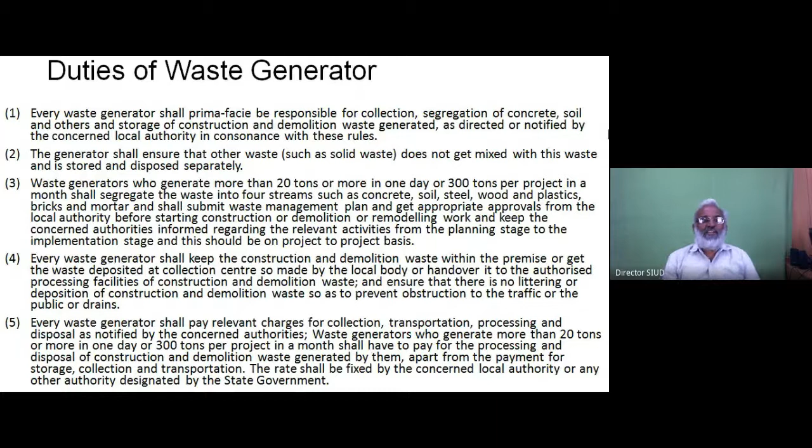Every waste generator shall keep the... shall... processing and disposal as notified by the concerned authorities.

My dear friends, you have got the authority to write up. You have to say that this is what is going to charge you. Don't do anything free of cost. If I am building a house, I have to at least spend 1 or 2% of the money for disposal of the waste. It has to be embedded within that. You cannot say 'no, it's not my problem, I'll just take cement and concrete and dump it, the government will take care of it' - that is not allowed.

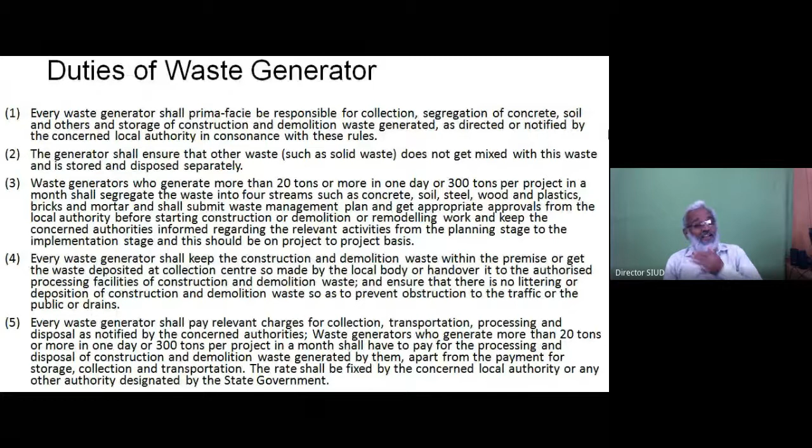Per ton, for example, it may be 5 rupees, it may be 10 rupees, it may be 20 rupees. It depends upon your capacity and how much waste is getting generated in that area. For example, in Mysore we have done a survey - we generate around 120 tons per day of construction and demolition waste. That's in the recognized sector; in the unrecognized sector we don't even know, it may be double that.

Then what are the duties of the service provider and the contractors? The government has clearly said either you do it, or make someone else do it on your behalf - that is where NGOs come in, and that is where a private party can start. Almost all C&D waste management can be operated on a PPP model - that is, public-private partnership model.

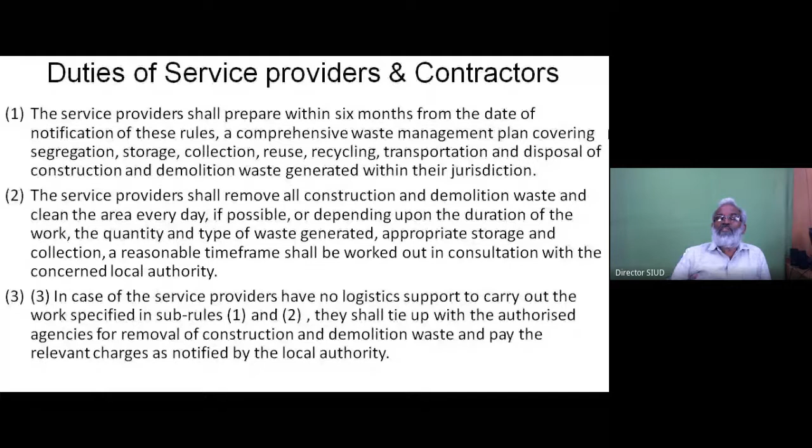In case service providers have no logistic support to carry out the work specified in sub-rules 1 and 2 - I'm referring to sub-rules - they shall tie up with the authorised agencies for removal of construction and demolition waste and pay the relevant charges as notified by the local authority. This is what I was telling you as tipping charges.

I can say that I'm a small contractor, I'm building only 20-30 or 30-40 houses. I don't have so many equipments, or I have to pay so much - it's fine, you don't have to, but make sure that you are going to dispose it with a relevant authority, paying relevant charges. What is the state government's duties here?

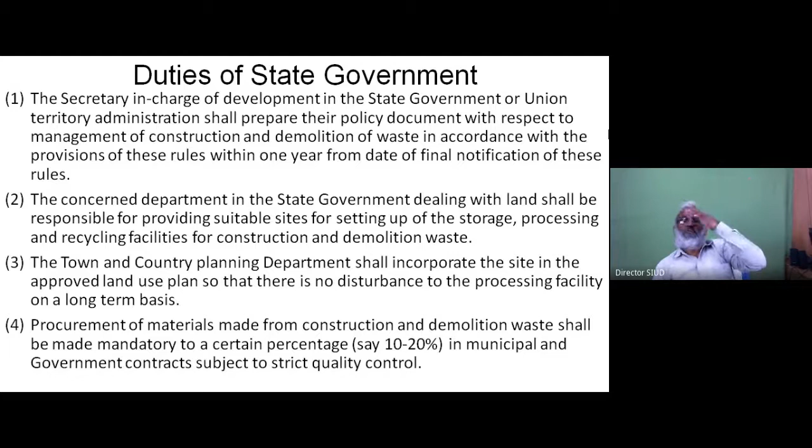Crushers, conveyors, screens. Okay, all these equipments, it will cost you not less than 1 to 2 crores.

So if somebody goes to the court saying that this is disturbing me, we have to just stop this on the state, and the whole process is going to stop.

So it is the duty of the state government to see that a proper suitable site is given, and to make sure that there is no disturbance to this processing facility on a long-term basis.

Procurement of materials made from the construction demolition waste shall be made mandatory to a certain percentage, say 10 to 20%, in the municipal and government contracts, subject to strict quality control.

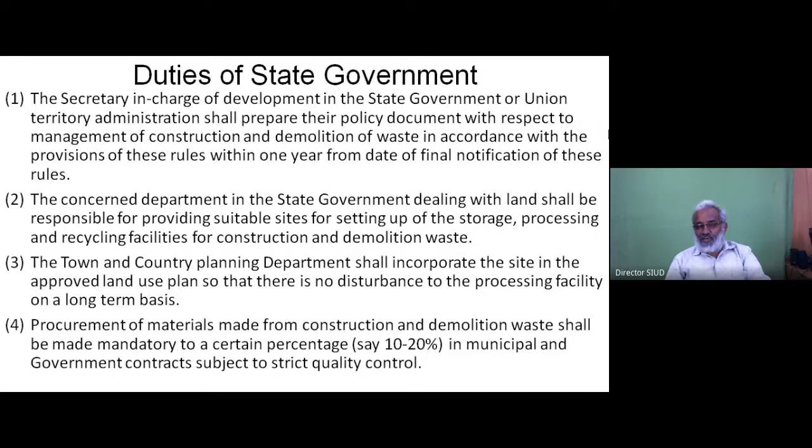Itself that this 20%, up to 20% can be made.

The urban local bodies we are talking about, the same thing, almost it is the same thing, because it's a smaller version. Issue detailed...

Urban local bodies, they can ask the person who is doing the construction, how are you going to dispose? You are not allowed to dispose wherever you want. Either we will provide you a site, or you have to reuse it, or you have to dispose it scientifically.

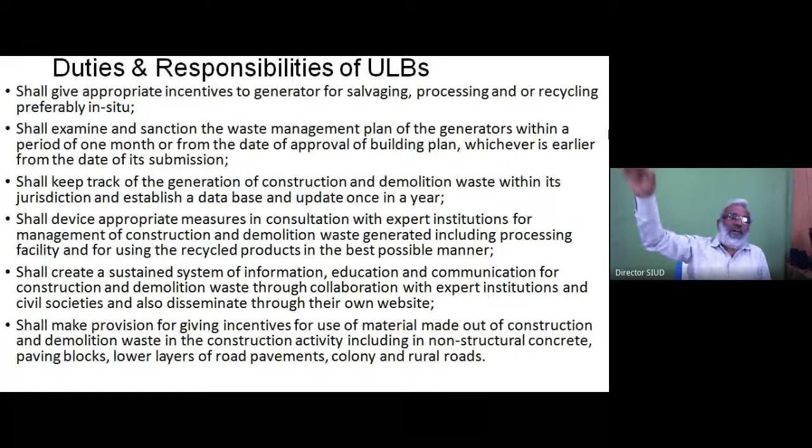Or what can happen is, you can educate them, you can give them the knowledge of how to make a soil stabilized mud block. Just want to bring in something here.

One of my friends - I don't want to mention his name because it becomes a person's praise - he's a well-known newspaper editor. He's in charge of one of the leading newspapers in Mysore.

He started constructing his house. When we were talking about C&D waste, he said, how can I do this? Believe me, my friends, he went around and asked me to provide him a soil stabilized mud block machine.

Which manufactures this soil stabilized mud block. He looked around at 3 or 4 buildings to see how it works out. And very recently, he has completed his building only with soil stabilized mud blocks.

The waste soil, or the recyclable soil, he has used and constructed his building with it. We are talking about news, we are talking about news channels.

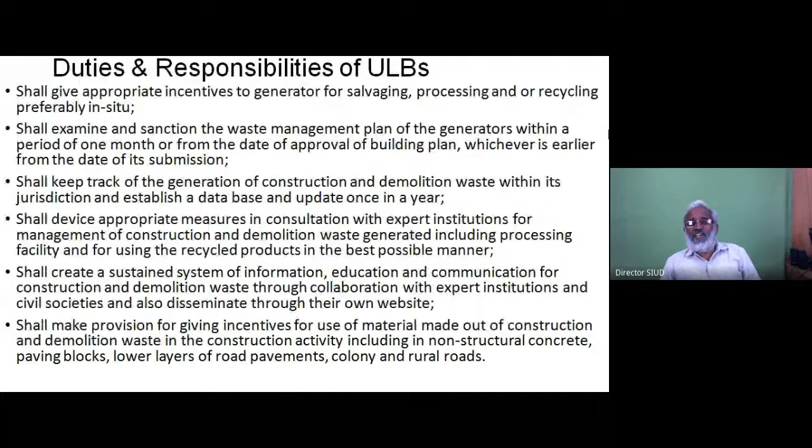These are the best places where you can disseminate this knowledge. Now and then we only look at the horrifying news, or the 'first among us' kind of news. So this 'first among us' news can instead be about sustainable buildings or C&D waste managed buildings.

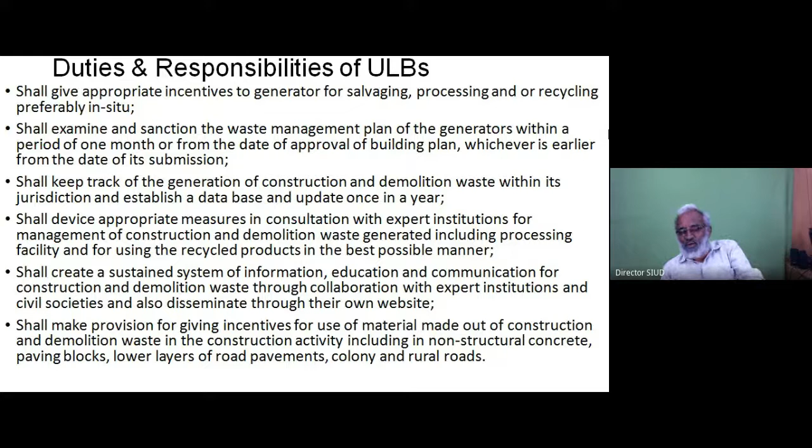Also the ULB shall make a provision for giving incentive. Not only in the state government, even here they can do this. Also for the lower layers of road pavement, colony, rural roads, wherever applicable. I will show you the products here.

Once I show you the products, then you will understand how best it can be made. How do you manage this? What are the methods of management?

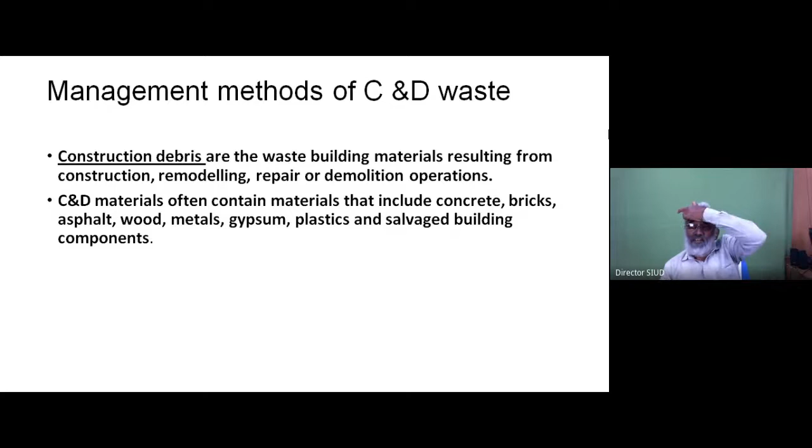See, what is construction debris? They are the waste building materials resulting from construction, remodeling, repairing or demolition. That's all, nothing else. The C&D material often contains materials that include concrete, bricks, asphalt, wood, metals, gypsum, plastic,

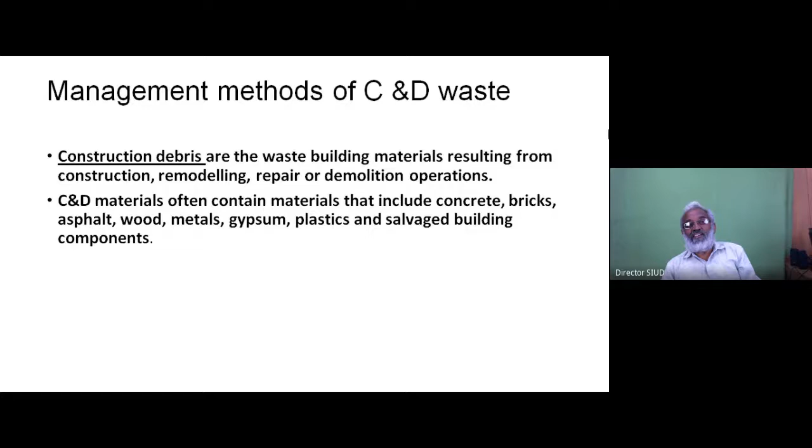Advantages of upcycling the C&D materials. Number one, it's a clean city. Any one of you, are you ready to look at your city or next to your house with the debris? I don't think anyone would agree with it, right? Everybody wants his house and his neighborhood to be clean. Then who is responsible? We all are responsible. So how it works is to see that you support the clean environment.

Most important, it saves the material cost itself. You're throwing something out and bringing in new materials. You can save material cost because the same soil stabilized mud block with the same excavated soil, if you make it, you're going to save money on that fresh material.

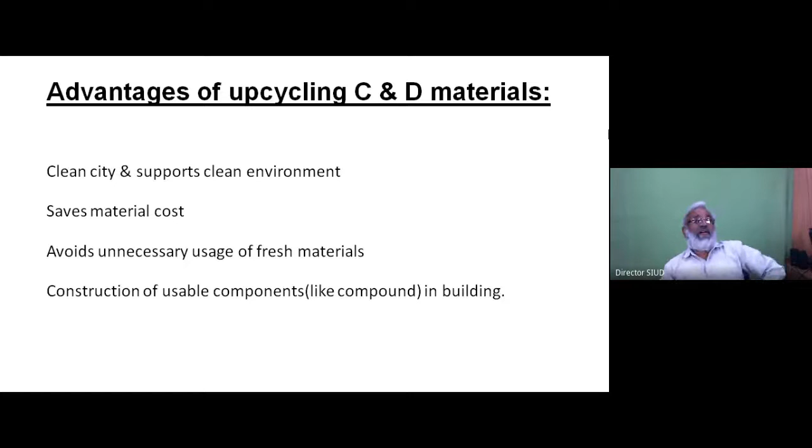Construction of usable components, okay, like a compound in a building. You don't have to have an M20 grade concrete there. You agree with that? Or it should not be a shabby, falling off thing also. You can have a better quality with a soil stabilized mud block or in situ concreting itself.

Where does it go? Look at this now. Let us start looking at those beautiful things. Everything in this picture is made out of waste C&D material. You can see many things over here. On the right side corner, you can see it is a precast staircase.

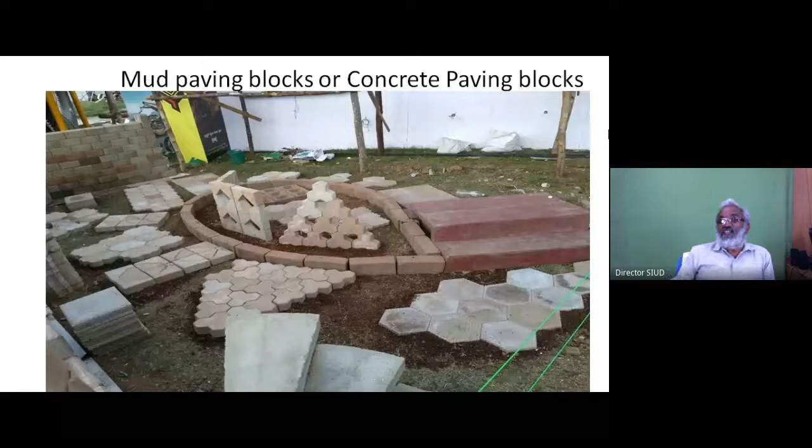The interlocking blocks on the pavers. Your veranda can have it, your walkway can have it. The first one in the center, the picture is not complete, it is for the spiral staircase. The normal bricks, you think of it, you can make it with the C&D waste.

See, this is a compound wall, 3 feet at one stretch, and up to 6 feet you can have a compound wall. All you have to do is have a shuttering plate, do the proper ramming, and you can have a rammed earth wall. In fact, if you see the photo, it was just taken after the rainfall. Still the wetness is there on the downstream also, you can see.

So nothing will happen. Our good old technology, especially if you go to the villages, are all mud blocks or mud walls. They have been standing some 100 years. Throughout the world, rammed earth is there. Now we have just added the English or scientific word of ramming it. That's all, the earthen wall is there everywhere. I have seen it in many parts of India and abroad. And if you just travel from Mysore to Hassan, Mysore to T. Narasipur, everywhere you can see these kind of mud walls.

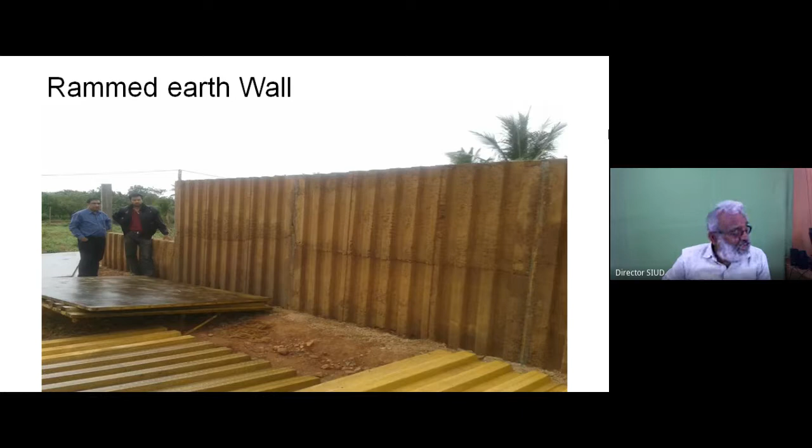But now, using science, proper centering, shuttering, and proper ramming, you can measure how much you have to ram, what the pressure should be, everything. If you consider the soil density, you can have a beautiful wall, and it can stand for many years without any problem. Most importantly, when you demolish this, you again get only soil, nothing. You don't get any waste from this.

This is what you have to do. When you start building bigger things like apartments and huge complexes, once you do the segregation - in solid waste management, which is also construction and demolition waste, segregation is very, very important. If you do segregation properly, half of your problem is finished.

The wood, especially shuttering wood and similar things, people search for wood. Actually nowadays it is very difficult to get wood because you have to cut a tree, which is not really a good thing to talk about.

The smaller pieces, smaller centering sheets for pillars can be taken from these things.

The steel - sometimes you just throw away a 1-inch MS pipe. If you cut a 20 feet pipe, you need about 16 feet, and 4 feet you just throw away. It will lay in the soil for many years. If you segregate it properly and weld it properly, the same 4 feet pipe can be made into another 20 feet when you join 4 or 5 of them. Welding is a fusion - you have to do it properly, then you can use it properly.

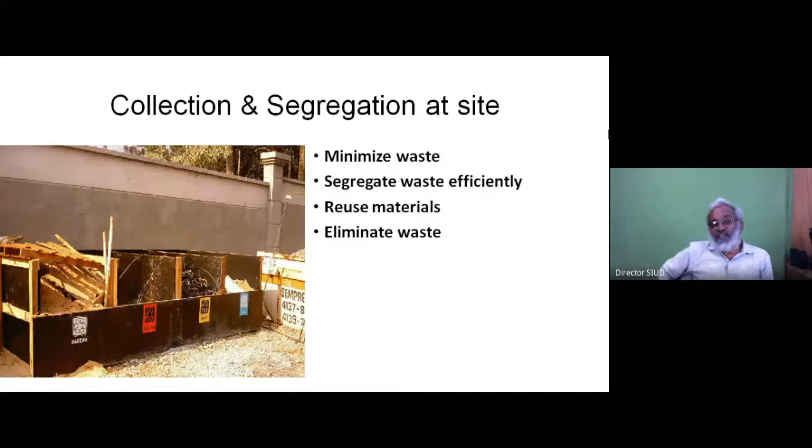The plastic is not at all a waste. We have made up our mind that plastic is a waste, but it is not so. What are the value-added products available through this C&D waste?

Can we have a system where you can just go to a house and collect these boulders? I have done this myself in a couple of villages. I'll go near their house and ask, are you ready to dispose of it? Can I clean this? I will pick it up at the rate of 2 or 3 rupees per stone. Initially they will hesitate, but once they know their area is going to get cleaned - since it's been lying there for 2, 3, 4, 5 years - they'll agree.

Droplets of water can make a mighty ocean too. So when you collect this, you can collect at least 2 to 3 loads in one day. It is possible. And when you crush it properly and segregate or screen it properly, you get 10mm minus, 20mm, 30mm, 40mm aggregate, which is very much needed.

The maximum amount you have seen in the pie chart is the soil which is available - it's about almost 40 to 50%. Where should that soil go?

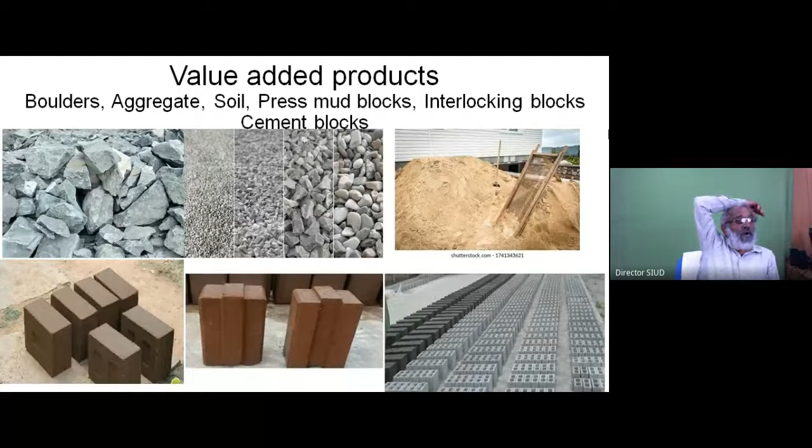At the lintel, again you use precast or ready mix, whatever types are available, and then you can continue the blocks. You have already seen a couple of buildings - this is the same material that has been used. The first building is with the soil stabilized mud block, the second one is with the interlocking blocks.

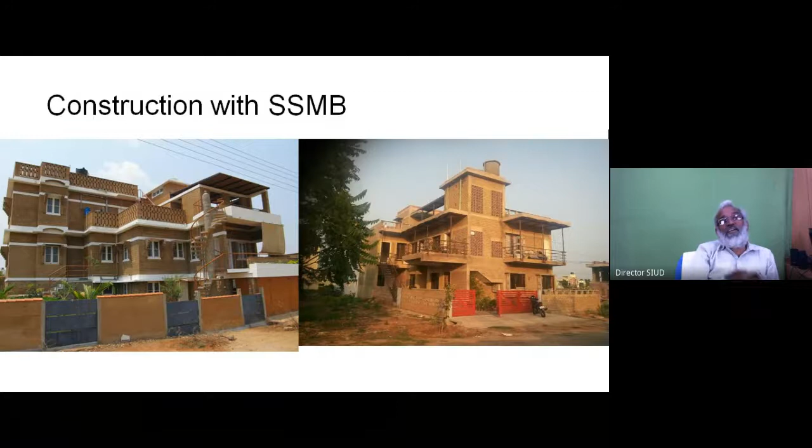This can happen - all we have to have is an attitude. The last picture is of egg layers, as we call them. This is the locally made soil cement concrete block, hollow - it is also hollow inside, as you can see.

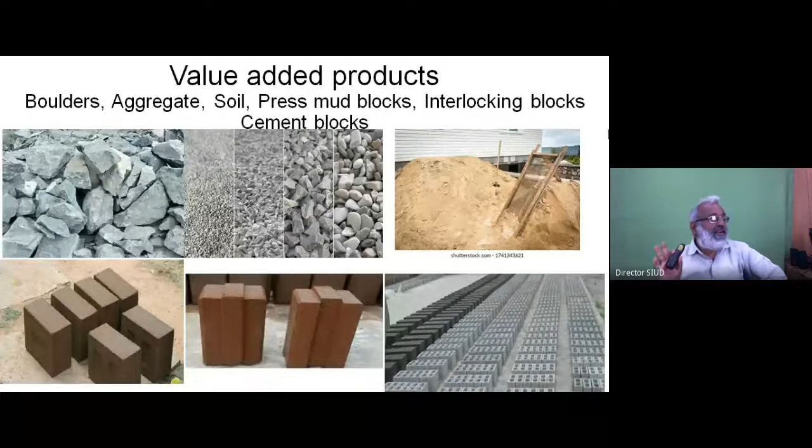Again, in this, except cement, everything is local material. Except cement. Okay, this can be done very easily.

Have a look at this. We are talking about plastic. We are talking about C&D waste. This is the IL&FS plant, which is in Delhi.

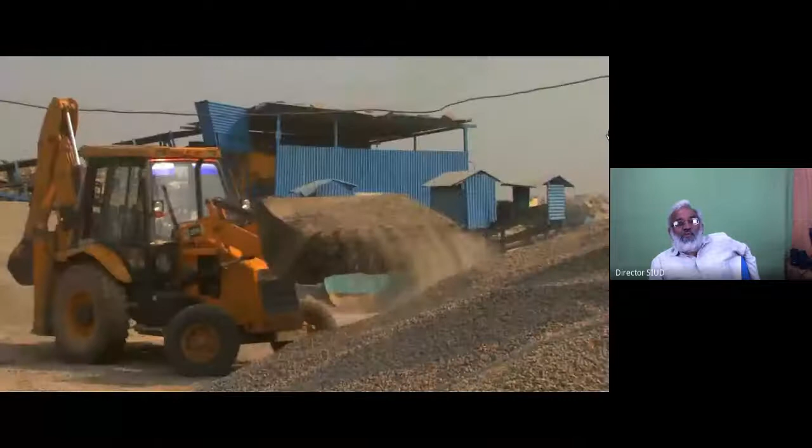I'll keep myself mute for a few minutes. The video is quite explanatory. You can look at that.

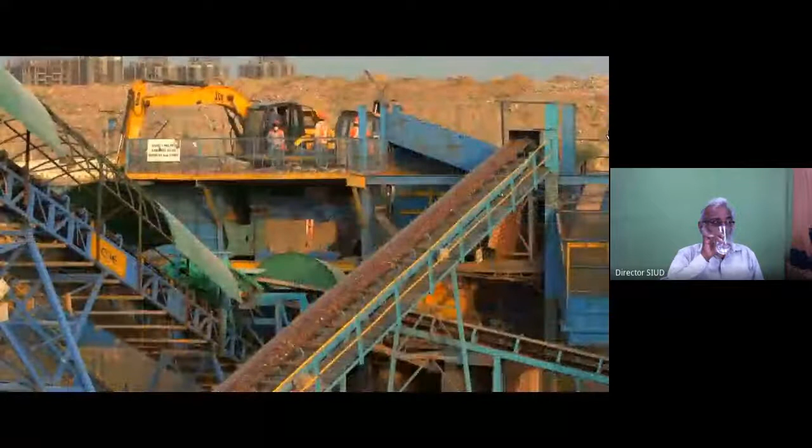As Delhi grows, infrastructure projects like construction of roads, flyovers, and metro routes generate large quantities of construction and demolition, or C&D waste. The city of Delhi itself generates 4,000 to 5,000 tons per day of CND waste.

In this context, an initiative by North Delhi Municipal Corporation with IL&FS Environment is a ray of hope shining through the blinding construction debris in the nation's capital. This unique project at Burari Jahangirpuri is based on a public-private partnership framework.

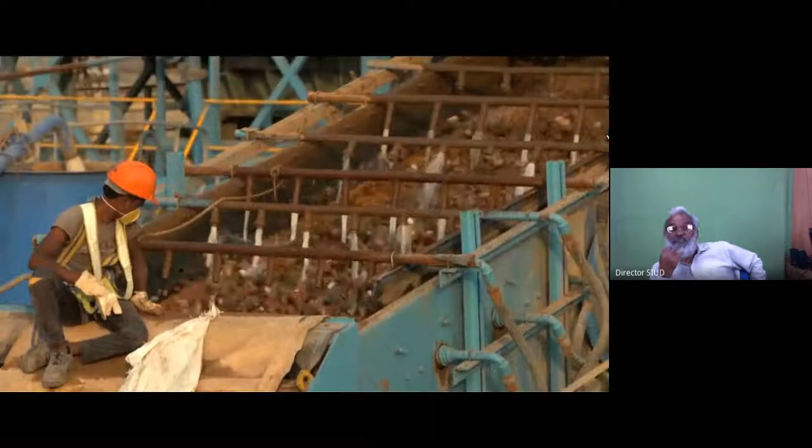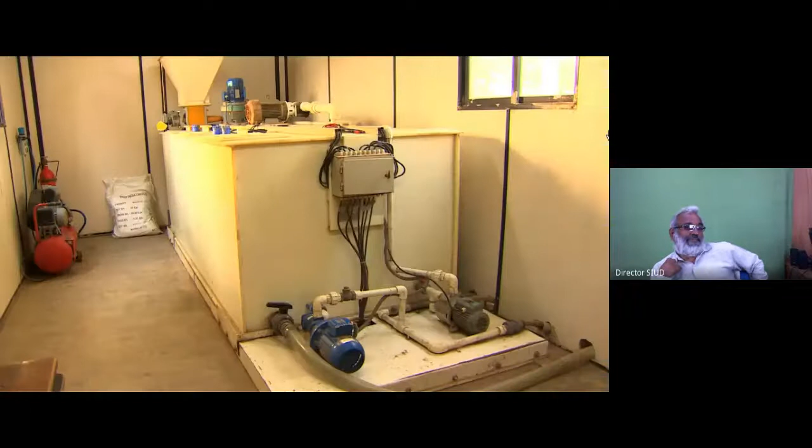It is India's first large-scale operational CND recycling facility. The plant is compliant with MSW 2000 rules and was originally set up to manage 500 TPD, or tons per day, of CND waste. Recognizing the pollution abatement capability of the facility, Delhi Pollution Control Committee enhanced the project's capacity to 2,000 TPD.

The technology for the plant was adapted to suit the CND waste generated in India. The wet processing technology was incorporated at the Burari plant to minimize dust as well as noise pollution.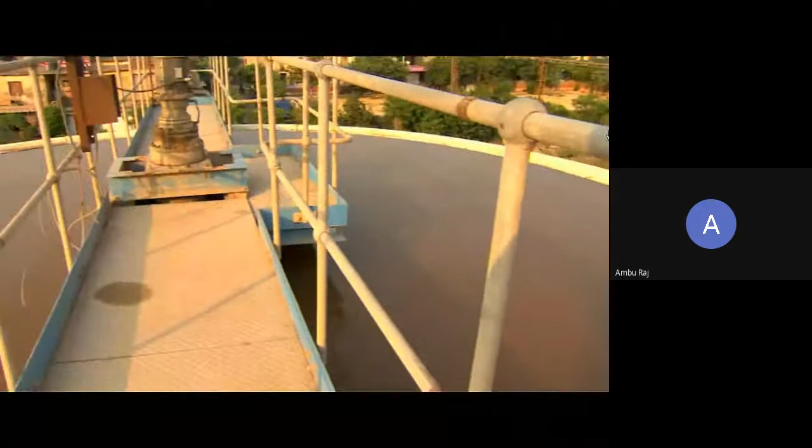The plant is able to recover and recycle about 95% of incoming C&D waste. The facility has ISO 9001, 14001, 18001, and SA 8000, that is Social Accountability certifications.

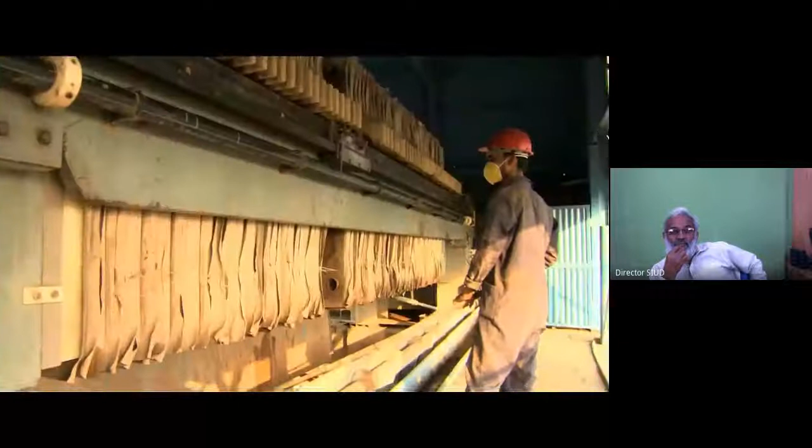Using the recycled aggregate in this process reduces the consumption of fresh stones and sand, thus preserving our natural resources and helping in reducing sand mining.

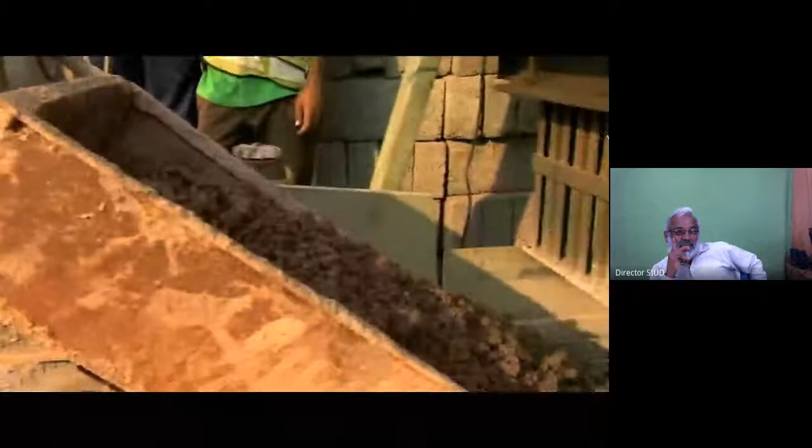The plant reduces the burden on landfill or dumping sites of the city and saves precious urban land. The Burari C&D waste management facility also provides employment opportunities to local North Delhi residents.

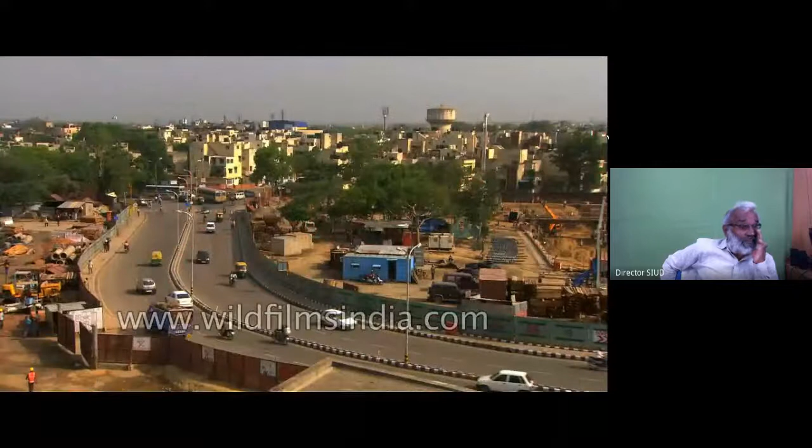With the steep rise in air pollution-related health problems and judicial interventions, urban local bodies face enormous pressure. In light of these problems, it is vital to have replicable models like the successful C&D waste management project at Burari. The C&D recycling project, being the first of its kind in the country, requires support for usage of recycled green C&D products.

The pioneering plant at Burari has earned many accolades from national and international environmentalists. This endeavor of IL&FS Environment has been appreciated by the Ministry of Urban Development, Government of India.

The Ministry of Urban Development has asked all states to look into the possibility of installing some facility for the population above 10 lakh people. The project has provided a paradigm shift for illegal dumping.

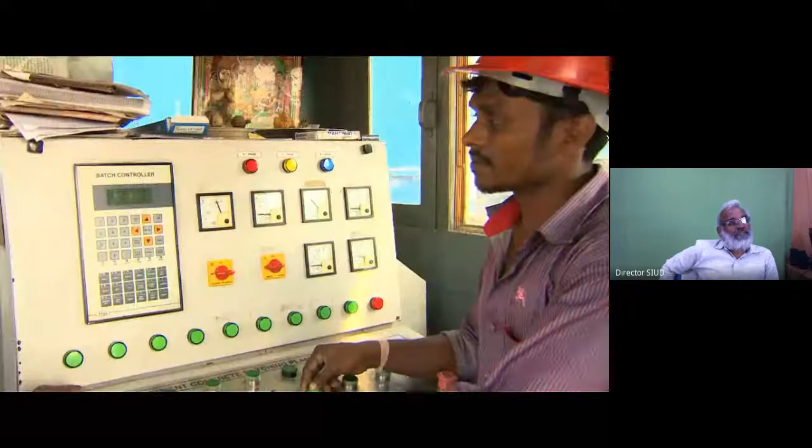I think you people have seen this and understood what is the value of the C&D. I'll show you once again. We were talking in this. We were talked about only the aggregate, the soil stabilized mud blocks, and other things.

Look at one more paradigm. This is yet another one. You can see this. Everyone calls plastic a waste plastic. But look at this now.

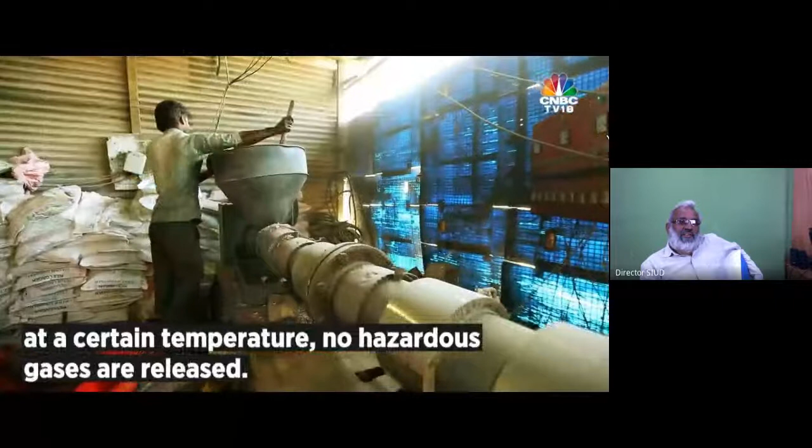Segregated plastic - basically using polypropylene, low density polyethylene (LDPE), and high density polyethylene (HDPE). This is a shredder machine. After shredding, it passes through heat and becomes molten plastic. There is no burning involved in this process.

I hope these two videos will open our eyes and show that there is nothing called C&D waste. People who are doing this in and around Bangalore, like the Indian Institute of Science, they're doing a wonderful job.

Rajesh Jain in Mysore is doing it. Ravi Kumar, Siddharaj, a small-time person on the ring road near Atinagar, is doing it too. And the list goes on. Here I've mentioned only the people I know, about 4 people around me.

But if I really go to the depth of it, those who make these pellets out of the plastic get prices that go up to 23 to 29 rupees, and sometimes it goes up to 60 rupees per kg. All these things are remunerative and easily available.

Now let us think, if we do all these things, what support are we getting? How do you select the site? The site for storage and processing of this recycling facility for construction and demolition waste shall be selected as per the criteria given in Schedule 1. We'll go to Schedule 1 later.

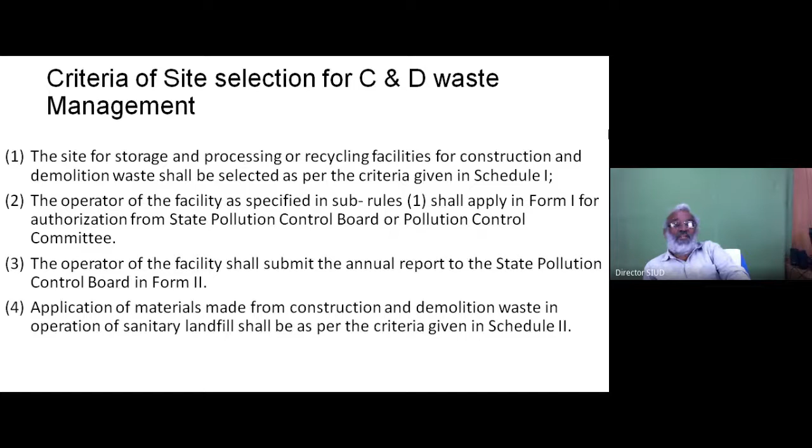The operator of the facility, as specified in the sub-rules, shall apply in Form Number 1 for authorization from the State Pollution Control Board or Pollution Control Committee, whichever applies at the ULB or corporation level. The application of material made from construction and demolition waste in the operation of a sanitary landfill shall be as per the criteria given in Schedule 2.

We just talk about Schedule 1 and Schedule 2 and leave it at that, but let us see in depth what Schedule 1 says. It is very clear: the concerned department in the state government dealing with land shall be responsible for providing suitable sites, as per rule 7.1. That means the government has to provide a proper place for these recycling facilities.

The local authority shall coordinate in consultation with the Department of Urban Development of the state or union territory, along with the concerned organization, for giving necessary approvals and clearances to the operators. Most probably this will be like a single window clearance.

Construction and demolition waste shall be utilized in the sanitary landfill for municipal solid waste of the city or region, as mentioned in Schedule 1 of the rules. Residues from the construction and demolition waste processing or recycling industry shall be landfilled in the sanitary landfill for solid waste. As we've already seen, the residue is hardly 5%, and sometimes it can be 0 - nothing will be left except the biological materials which may be present.

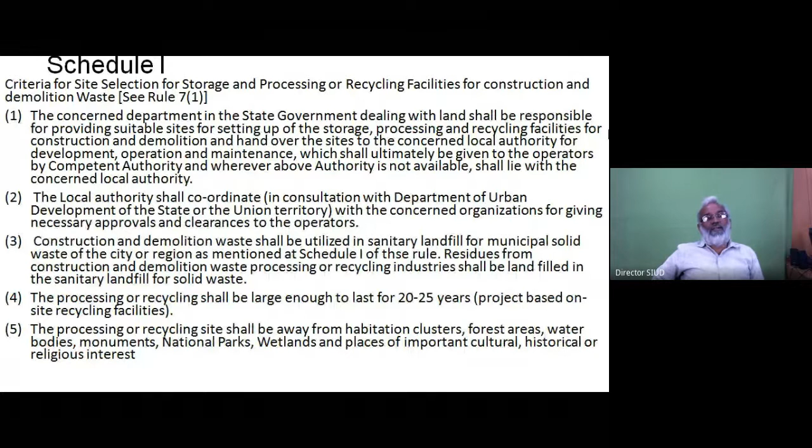That can also be sent back to solid waste management, converted into compost or biogas. The processing or recycling facility shall be large enough to last 20 to 25 years, based on site recycling facilities. That's why, my friends, for a city with the capacity of Mysore, where 12 to 15 lakh people live, you need around 6 to 7 acres. For a cleaner and better environment, it should be spacious, not congested where people have restricted movement.

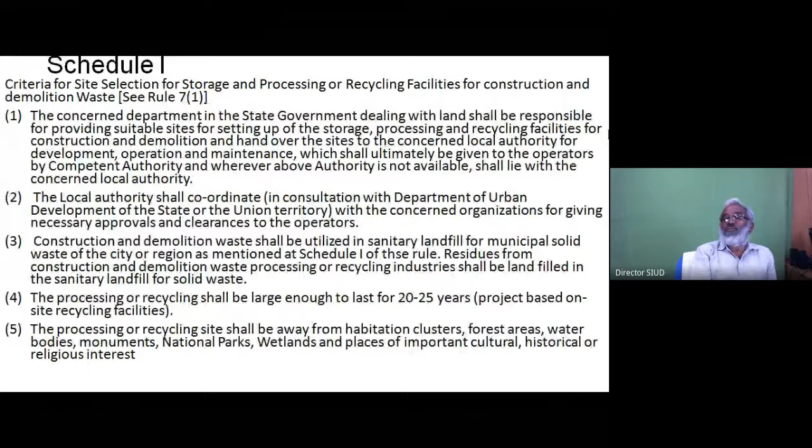The processing or recycling site shall be away from habitation clusters, forest areas, water bodies, monuments, national parks, wetlands - this is very important. You're doing something good, but you should not spoil any of these things, whether it's a wetland, a national park, or monuments, and it should not cause any problem to dwellings or habitation clusters.

A buffer zone of no development shall be maintained around the solid waste processing area because of dust particles during the dry period or summer. Wherever there is more than 5 tons per day installed capacity, this buffer shall be maintained within the total area of the solid waste processing and disposal facility. The buffer zone shall be prescribed on a case-to-case basis by the local authority - you cannot have the same single standard for everything.

If it's surrounded by good greenery, that's well and good. Otherwise, you can put up a barricade with corrugated sheets or powder-coated sheets of 10 to 20 feet and maintain it that way. So it's a case-to-case basis - we have to deal with these things.

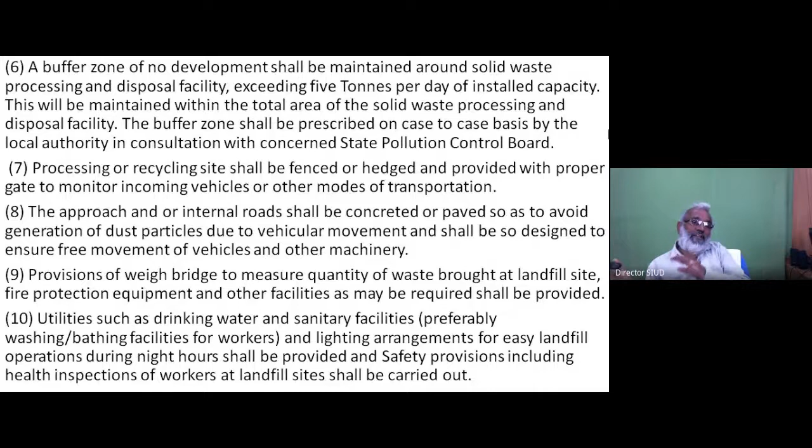The processing or recycling site shall be fenced or hedged, provided with a proper gate to monitor incoming and other modes of transportation, and tipping charges. Whenever the dump truck comes, it should be recorded properly - from which site it is coming, how much they have brought, everything - and everything should be in writing so there is good transparency in the dealing.

The approach and internal roads shall be concreted or paved to avoid generation of dust particles due to vehicular movement, and shall be designed to ensure free movement of vehicles and other machinery. Not only dust, but during rainy days it should not become a cesspool.

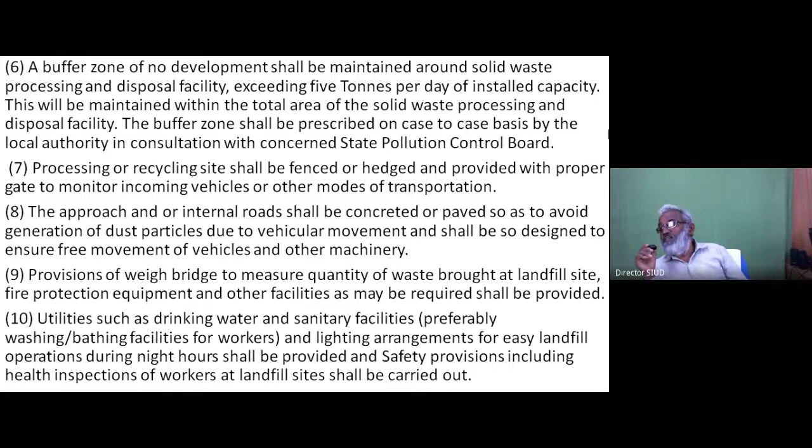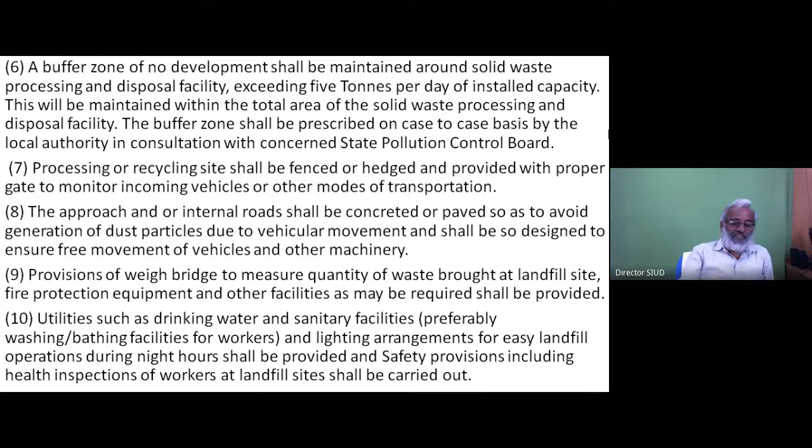There should be provision of a weighing bridge to measure the quantity of waste brought in or product taken out, so that will give you a clear picture of what percentage of waste you have segregated or value added. Utilities such as drinking water, sanitary facilities, preferably washing and bathing facilities for workers, lighting arrangement, and easy landfill access - all these things are needed.

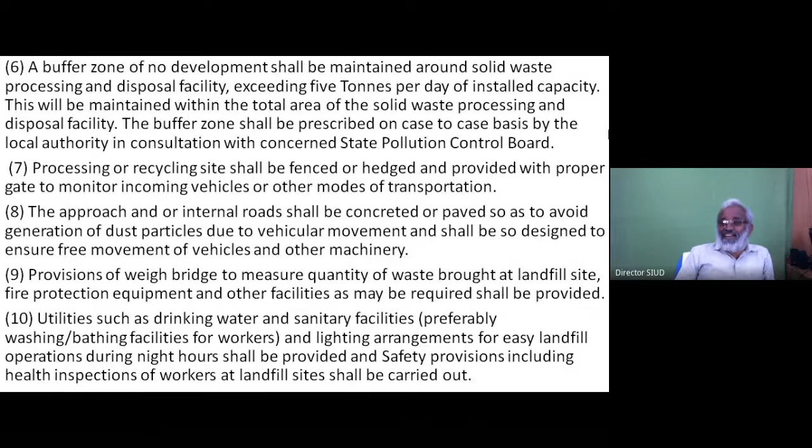It's an industry - let us talk about it that way. It is no more just a waste producing or waste segregating area. It's an industry because you are going to get money out of it.

In order to prevent pollution from these, for treatment of the water, you may have to have a settling tank and recycle it. Again, environmental protection and discharge norms of 1986 should be followed. For work zone area air quality, you have to have air quality monitoring equipment and make sure the air quality in that area is good - this is done in consent with the pollution control board of the local area, which is very easy. The measurement of ambient noise - sound pollution - we have to think of that too.

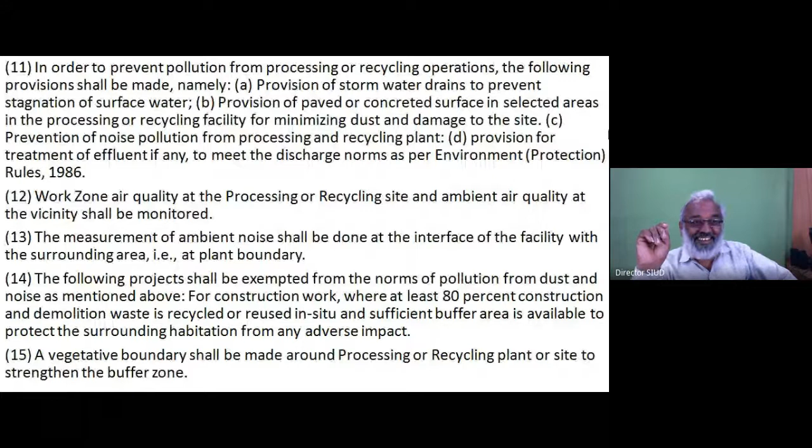The following projects shall be exempted from the norms of pollution from dust and noise mentioned above for construction work: where at least 80% of construction and demolition waste is recycled or reused in situ, and sufficient buffer area is available to protect the surrounding habitation from any adverse impact.

My dear friends, let me read it again - we are talking about fringe benefits, giving incentives, and this is one of the incentives. The following projects shall be exempted from the norms of pollution from dust, because you are already going to maintain this in the city. So for construction work, where at least 80% of construction and demolition waste is recycled, there are no stringent rules for that. Okay, then we'll go to the next.

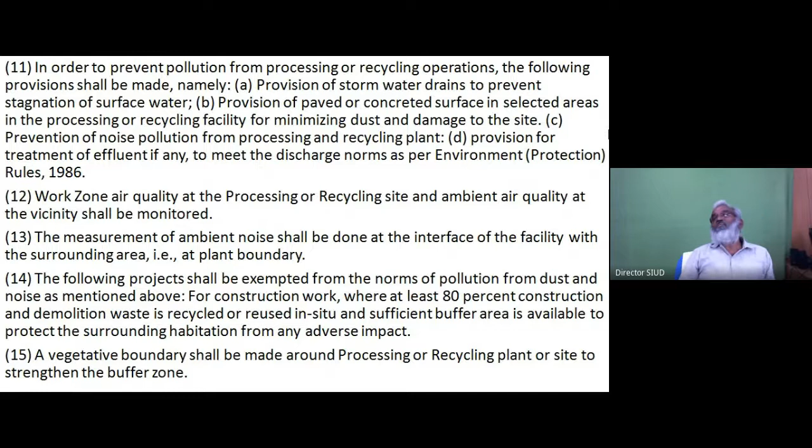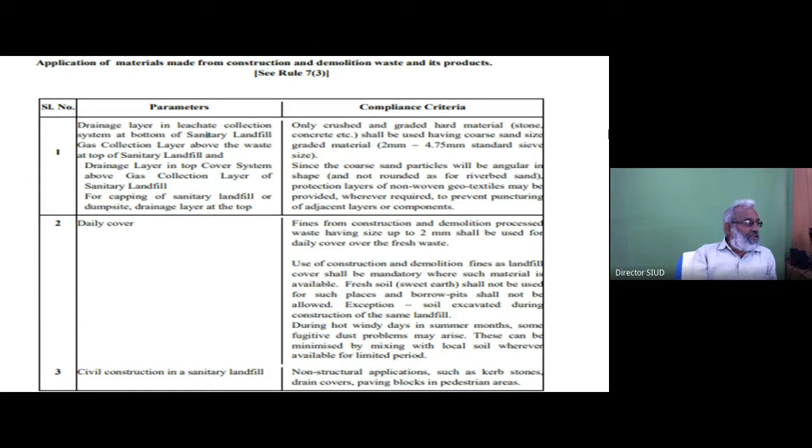A vegetative boundary shall be made around the processing or recycling plant or site to strengthen the buffer zone. Not only that, you are going to produce oxygen, you are going to stop the sound - you are going to have a beautiful place there. Think of these things - we're talking about rule 7/3, how you have to construct. Let me not go into the details of this, because you can download these things - it's available on the website. Everything is very easy, okay.

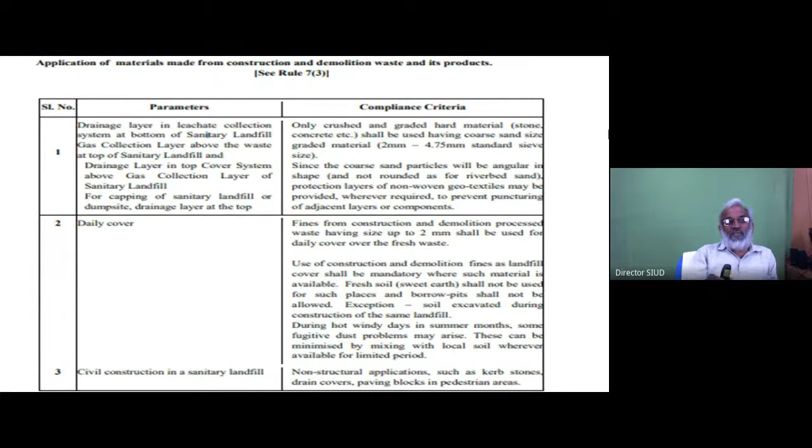Daily cover, where you have to do the daily routines, the civil constructions, what all the things you have to do—everything is mentioned in the paper. What are the standards for products? The duties of Bureau of Indian Standards and Indian Roads Congress.

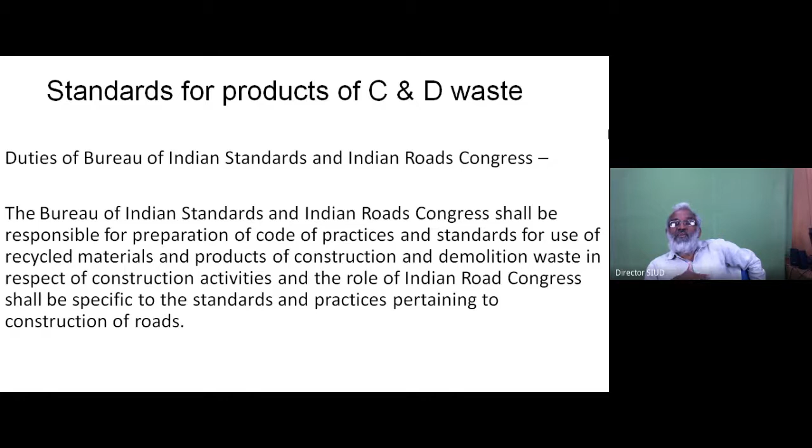Standard for use of recycled materials and products of construction demolition waste in respect of construction activities, and the role of Indian Road Congress.

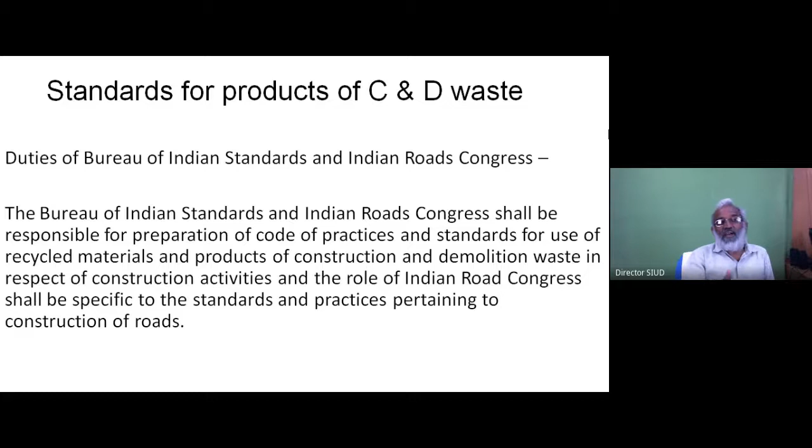For everyone, the government has made a beautiful complete cycle. There is no open loop in this one. The loop is complete. If there is production of construction demolition waste, it can be value added with the permission from the local bodies without paying too much of the charges, except for the tipping and other transportation charges. You can reuse the material, which will be lower cost. It goes back into the cycle. So there is nothing called waste in this.

So what are the duties of the State Pollution Control Board, which plays a very big role? I am in tandem with the Mysore Local Pollution Control Board. They have helped us a lot in understanding what is the norms to be met, what are the air qualities, what is the standards, everything. So if you go and talk to them, they'll make sure that there is a committee, the Pollution Control Committee, which shall monitor the implementation of these rules.